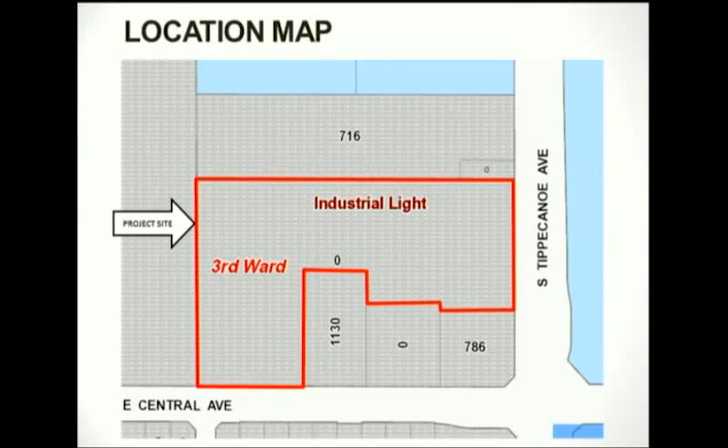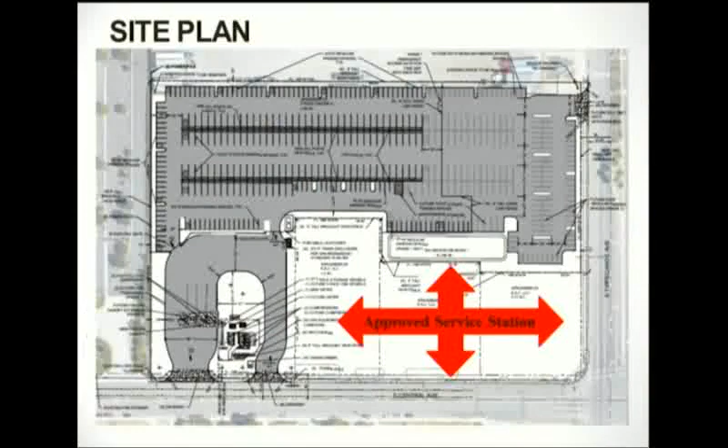Tonight our recommendation is that the Planning Commission adopt resolution number 2022-022, adopting the mitigated negative declaration and mitigation monitoring and reporting program in accordance with section 15074 of the California Environmental Quality Act, and approving Conditional Use Permit 21-16 based on the findings of fact and recommended conditions of approval. And that concludes my presentation.

Thank you. Hereby open the public hearing for item number 4. Is there anyone wishing to speak on this item? Yes. Here. Michael Lawson?

Good evening, everyone. Nice to see you again because we were there on Saturday. 1, 2, 3, 4, 5. Got a few pictures to show everyone here. Let me get going, I got 3 minutes here. Can you hand that out to him?

We were all at the site on Saturday, June 4th. Remember the noise that came up? We did a decibel reading of that yesterday. If you go to page, I think it's page 4, you'll see a decibel reading at that same site. It read in at 95. California Act, go to page 2, and you'll see that it's above the decibels.

Remember that noise that came on that ran for 12 minutes? And they stated that they're going to have 120 trucks per day, 24 hours a day, 365 days out of the year. Look at the site plan. Look at the distance between the runway and the residence. It's 900 feet. The residents are exactly 100 feet from their pumping site.

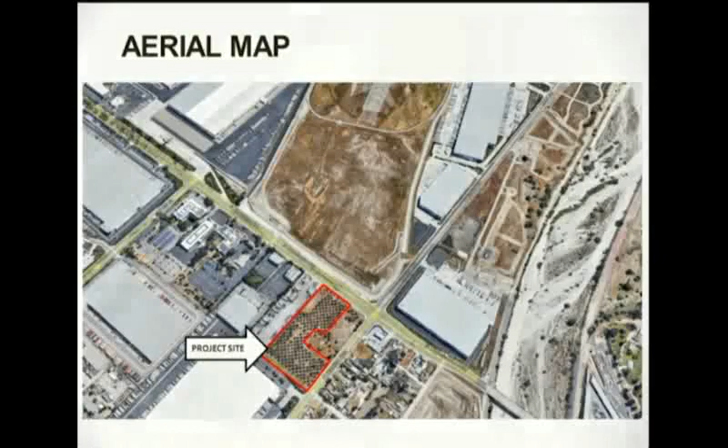Remember the noise. I'm not worried about the explosion when the jet goes down, but remember the smell that we got. They said on Saturday that one drop of that will clear a room. Well, that's one drop every time that truck fills up. And if you live within 100 feet... I also did a little canvas today between the hours of 1 and 2.

Nobody on that street on Central received this memo. Nobody. And nobody could read it because also if they got it, it was in English, and they're all Hispanic. That's low-income housing, and if you look at one of the pages there, in the black, shows how many residents live in that area.

Okay, they said there's no residents. Let's go back to what they also said, that they're on a runway, at the end of a runway, at every airport or on an airport. They have 25 airports. Not one of their sites is within 900 yards of that runway or tarmac at the end or at the beginning. They're all, either if the runway runs north and south, they're east and west. If they run east and west, they're north and south.

I also spoke to the drivers yesterday at that airport. When there's more than 4 trucks, the facility shuts down. It overheats. What happens is the trucks and buses back up. And the guy said there could be almost 100 trucks sitting there and buses and vans, and they have to wait for hours till their tech shows up out there. Remember when I talked to the driver that day? Well, there's a lot that needs to be addressed here.

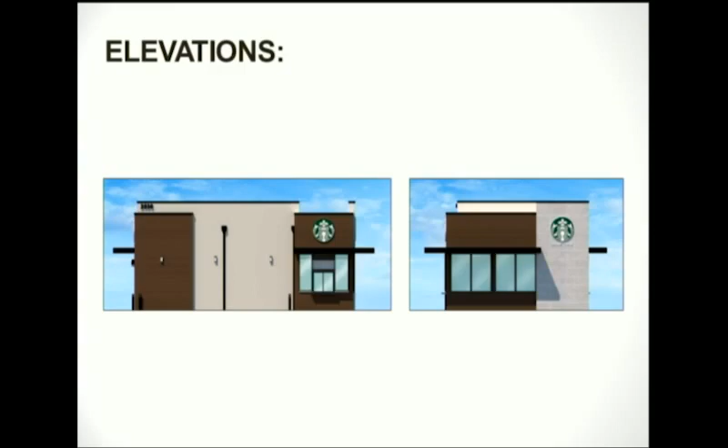The ones you're looking at specifically this evening are those fronting the street itself. The image on the left-hand side has the pickup window, fronting Highland Avenue directly, and the portion on the right-hand side is the east image, which is actually interior to the site.

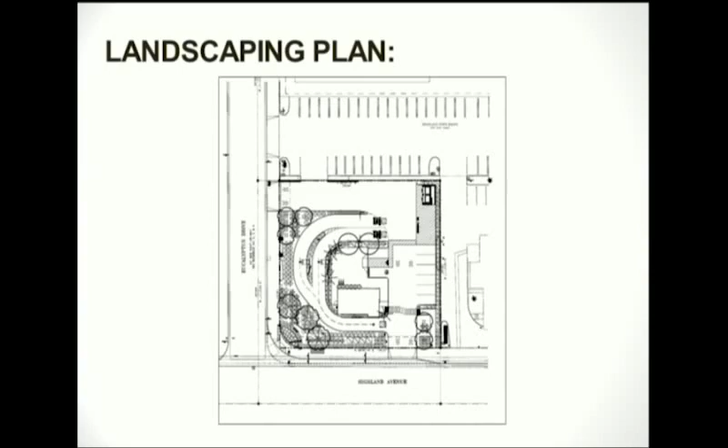The proposed landscaping plan, since it's a smaller property, is more focused along the street frontage. You can see an enhanced corner with a concave design buffering the drive-through from the street and intersection, with additional landscaping along the Eucalyptus frontage and along Highland to help screen the pickup window, and limited landscaping within the parking area to buffer spaces from the adjacent property.

With that, our recommendation this evening is to adopt Resolution 2022-030. It would find the project categorically exempt as a small structure under CEQA, and approve CUP 2203 based on the findings and subject to the recommended conditions.

One note I want to make: there's a replacement copy of the resolution provided at the beginning of the meeting. There were two omissions on my part in preparing it, both in findings 5 and 6, on pages 4 and 5 of the resolution. There was reference to a subsequent variance application, which was an error included in the reso. That is not part of the proposal in front of you. This project is fully compliant and does not require any variances.

If I may, Commissioner, it's hard to see on the projection because they're a little lighter on the image, but it's also shown on the copies included with the packet. Currently as proposed, going back all the way to the entry of the dual drive-through, there's 15 cars shown for capacity. Additionally, the way it's been designed, that other drive on Eucalyptus would allow, if it overflowed, the traffic to queue up in that area without obstructing the formal entrance to the drive-through, the exit, or the parking spaces themselves.

Okay, so that's been taken into consideration. Yes, based upon some of the issues we have in our community with the existing Starbucks. That's correct, yes. Thank you, sir. Yes, sir, thank you.

It looks like there's existing parking outside of this project area with the rest of the development. Has there been any discussion with those property owners about potential parking there, which will probably happen? There wasn't anything needed for reciprocal parking other than what is provided on the site.

On the plan, and it does get cut off here, there's an existing drive connection right along the north, just in off the driveway from Eucalyptus. That is being maintained, so it would still have connectivity with the rest of the center. But because the property is just a drive-through use only, with just that limited pickup window, it didn't need additional parking as designed, because you wouldn't have customers there waiting, going inside, or sitting like you may in more of a cafe setup.

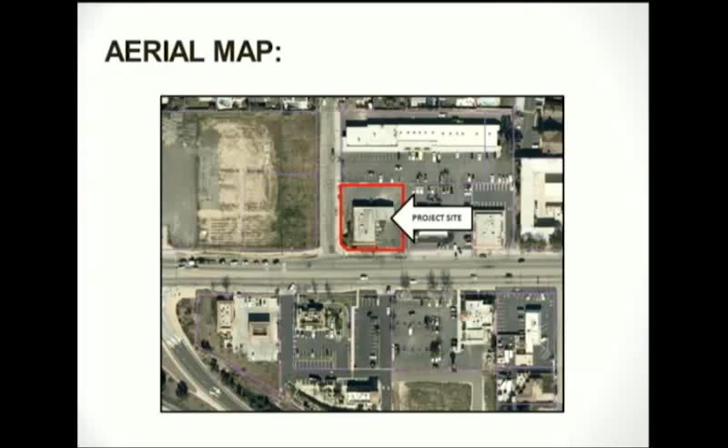Can you go back to the other drawing there? Yes, of course. So coming in off of Eucalyptus, that's a pretty sharp U-turn there to get into the lane, isn't it? It is, but the templates for that were looked at as part of their on-site circulation. For the passenger vehicles, it's a doable maneuver.

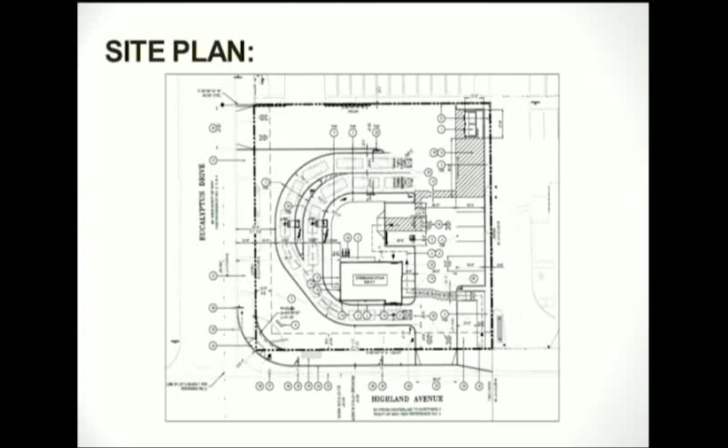And then they merge into one lane and exit out on the... Yeah, they would be able to come in here. There's 2 lanes that they would be able to queue in to order, the dual ordering boards along the western side of the property, and then after that they would merge down to the single pickup. Then exit here, and depending on the way they were trying to maneuver, they could come out to Highland. If they desired, they'd be able to go back up around, come to Eucalyptus, possibly for different movements.

And I know you've looked at traffic impacts and things - is that going to be maybe right turn only, or are we going to have cars sitting in the driveway waiting 5 minutes to turn left? There were not any restrictions for movement that were provided by Public Works as part of the review. The project didn't generate enough traffic to warrant that.

Starbucks. Okay, thank you, thank you.

Through the chair - Commissioner brings up a very good point. With the traffic there, could there be a restriction applied to that to where right-hand turns only? Are you referring to the driveway specifically exiting onto Highland Avenue?

We will look into this one, within the plan, and we will determine if that is something that is reasonable.

There's issues trying to make a left-hand turn coming out of Two Guys over there. Our traffic impact studies for this project don't show any impact, but that could be because there's a Starbucks nearby that has issues. We'll make sure the queuing on the property itself is fit for whatever the traffic is. I'd take a close look at that because I think it will work out real well. Looks like a real clean project, and I commend you for cleaning up the taco vendors.

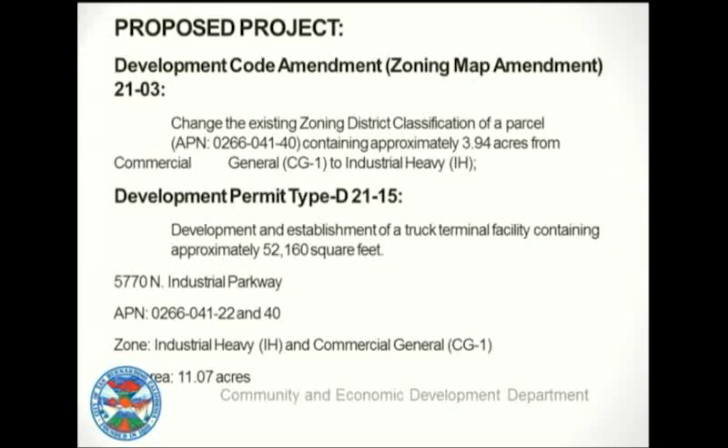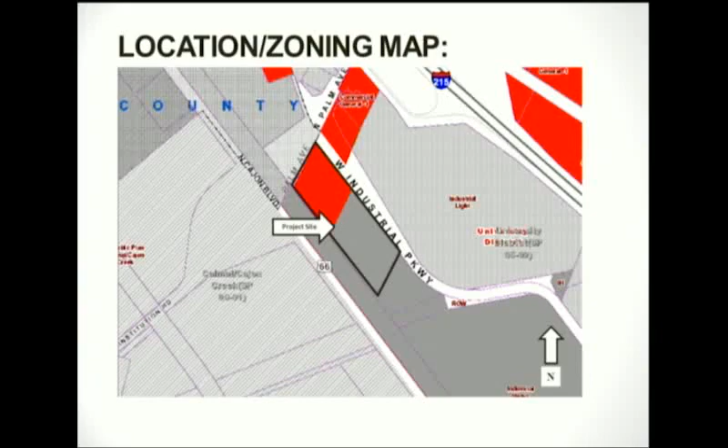As part of the analysis, this is a request for the 52,160 square foot truck terminal facility. Access to the site is being provided off of North Industrial Parkway. There are 2 driveways being proposed. One is the main driveway, on the southeasterly portion of the site, which would be the primary access to the site. That driveway would be 50 feet wide.

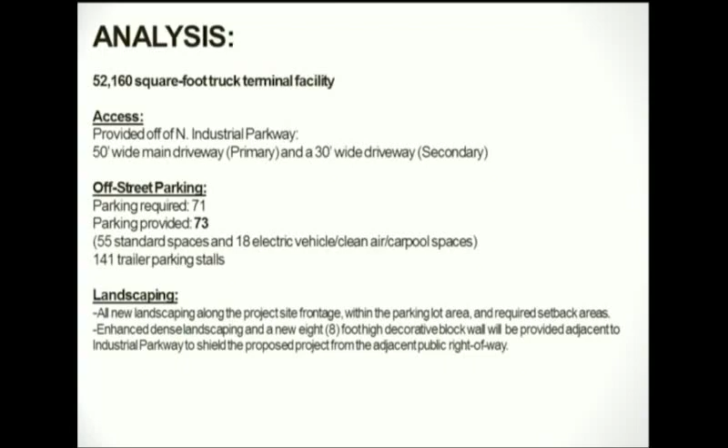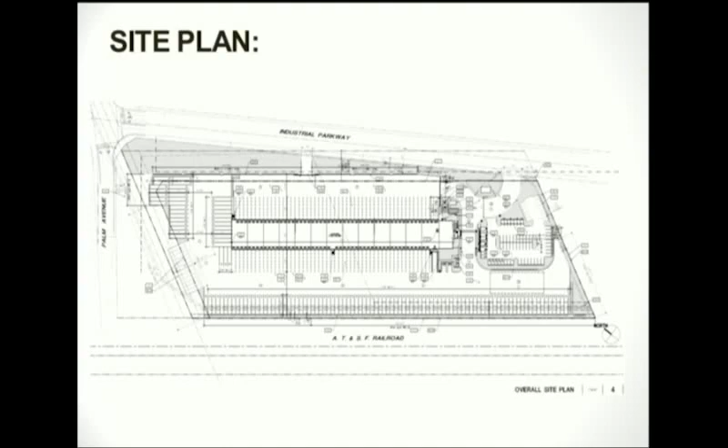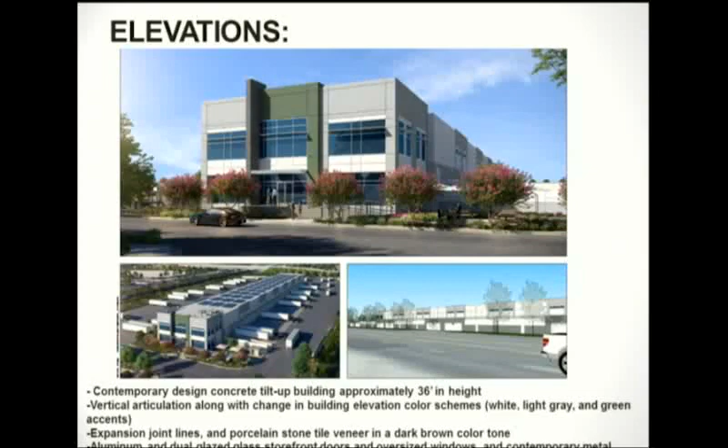With that, it is staff's recommendation that the Planning Commission adopt Resolution 2022-024, forwarding a recommendation to the Mayor and City Council for the adoption of the Mitigated Negative Declaration for Development Code Amendment Zoning Map Amendment 21-03 and Development Permit Type-D 21-15, in accordance with Section 15074 of the Public Resource Code, and direct the Planning Commission Secretary to prepare and file with the Clerk of the County of San Bernardino a notice of determination as provided under Public Resources Code Section 21152 and California Code Regulations Title 14. In addition, the recommendation is for the Planning Commission to adopt the Mitigation Monitoring and Reporting Program for the Development Code Amendment 21-03 and Development Permit Type-D 21-15, and adopt Development Code Amendment Zoning Map Amendment 21-03 and Development Permit 21-15 based on the findings of fact and subject to the recommendations of approval. That concludes my presentation.

We also have the applicant and his project team that will be presenting a small presentation on their behalf. Harold, would you kindly put the slide up for the aerial, please? Sure.

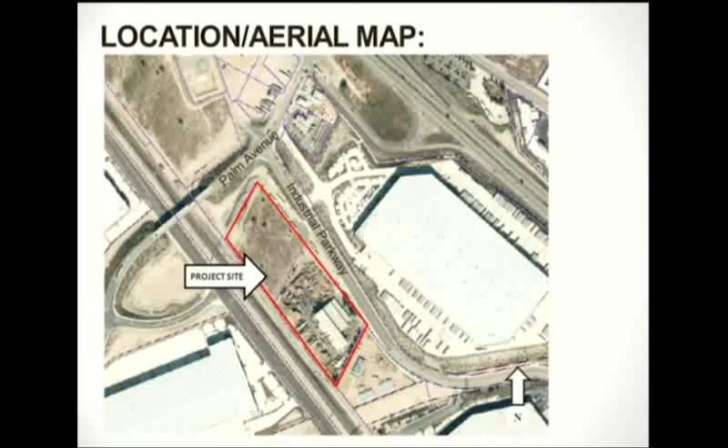Some other improvements that were part of that travel center project involve the signal up on Kendall, right in that area. There are some improvements that will be done at that intersection, and requirements to reset the computers for the signalization for light queuing, and also requirements to restripe underneath the underpass. Right now, if you're coming from the Verdemont area, there isn't a designated left turn lane to get onto the freeway, so the travel center project was conditioned to restripe so there's a turn lane directly onto the freeway and another lane or two lanes that drive straight through. This project is conditioned to contribute towards those improvements as well. I just wanted to mention those conditions that were analyzed as part of the project.

Thank you. And just to add to Oliver's comment, those conditions would be condition number 35, letters G and H, as part of your packet.

Open up the public hearing for item number 8. Anyone wishing to speak on this item?

We do have the project applicant here as well. They also would like to provide a small presentation on their behalf. If the applicant has a presentation, let's allow them to present first, and then we'll do public comment. Can we do the public comment first? Because I have to go. No, we'll do the applicant's presentation first - it'll be quicker. Thank you. Okay.

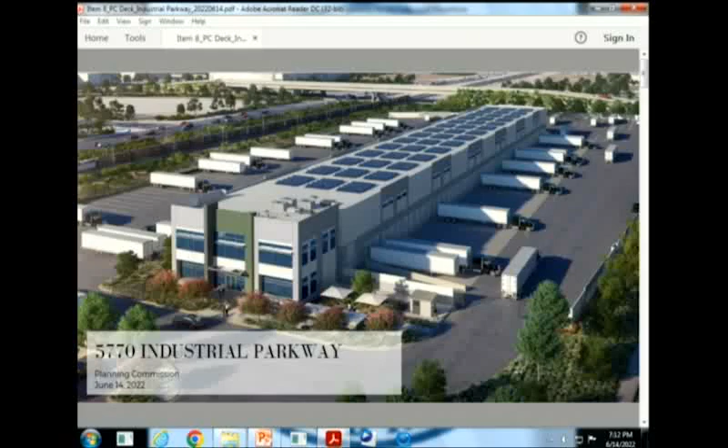Thank you, Jeremy Kraut, applicant's representative, here to do a brief presentation and answer any questions. Also have the applicant here and the CEQA preparer in the audience as well. I just want to first thank the Commission for your time and consideration of the project, and also the staff - you have a staff that has a lot of projects they're processing and a lot of work going on, and they've really been great to work with. They put a lot of time, effort, and thoughtfulness into every project. So with that, I'll go through a brief presentation. The applicant itself is Dedeaux Properties - they've been working in the related field for over 50 years.

They also have a foundation, the Rod Dedeaux Foundation, who works with community members to give back and engage the communities they work in. They participate in scholarships, giving awards to underprivileged youth to help them achieve their academic and sports-related goals and dreams. As part of that, they've identified San Bernardino as a key area they want to contribute to.

They worked with a number of organizations, including the Oak Grove Center, and provided a letter of support to thank the applicant for their effort, not just on this project but in the area over time. I'm happy to distribute these letters at some point during the presentation.

As part of the overall effort, starting over a year ago, they've been working with the community to let them know about the applicant, their intentions, and to give chances for feedback and dialogue about how they can help the community in various ways. A number of community organizations they've talked with, and events they participated in, are shown on screen. They attended these events to engage with the community and let them understand what the company is about.

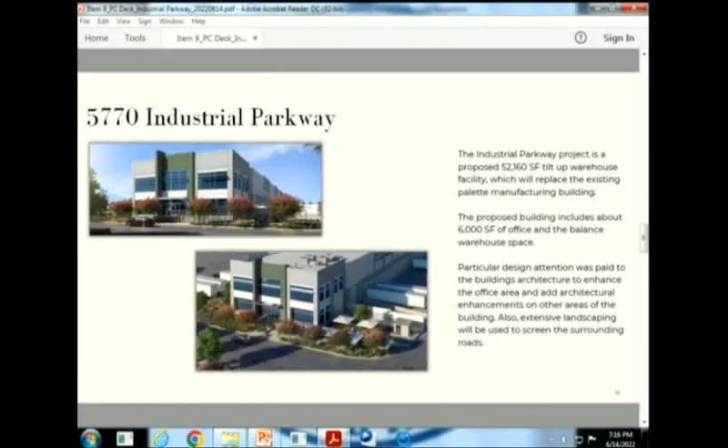We went through some of the slides about the elevations and the plans. I wanted to point out that we heard loud and clear from your staff and other city officials the importance of design. Even though the site is set back and not really visible from the area, the importance was hammered home to include quality design, and that's what we attempted to do, especially dressing up the areas visible from the roadways.

On the access point, this somewhat shows the constraints on the site. There's an existing access that provides access down to the rail line. A buffer is created along Industrial Parkway, with an emergency access off the northerly portion of the site. The primary access is further east, closest to all the other industrial uses there.

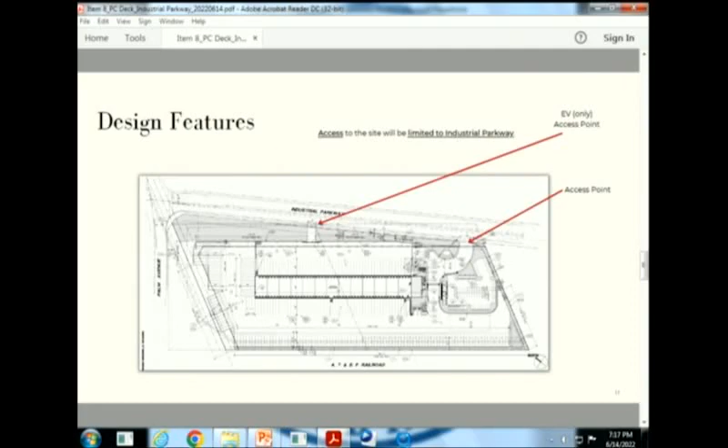As far as design features, Dedeaux is committed to sustainable features in all their projects. They go above and beyond requirements, striving for a LEED Silver equivalent design — meaning solar panels are installed, and they look for any green sustainable features they can incorporate into the building, working with the tenant to identify those up front, like EV charging stations, to make the building a low energy user. They also recognize the need for employee amenities and have that built into the design along the frontage.

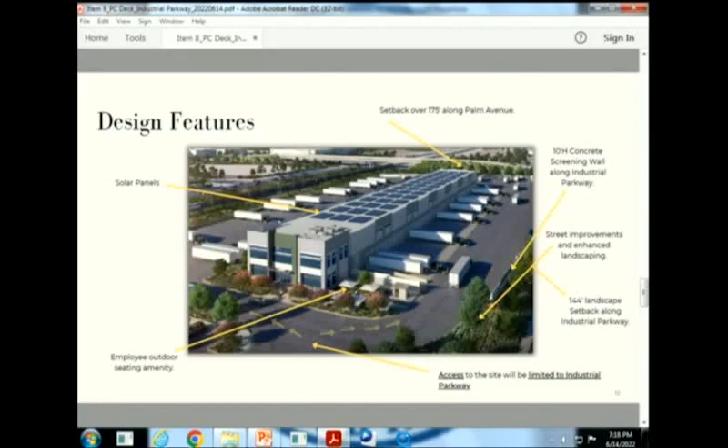I mentioned some of the other elements related to that. They do look at screening, the screen walls, the idle restrictions are mandatory, but they take that very seriously because that's a state mandate, as well as the drought-tolerant landscaping, solar panels, and EV charging, like I mentioned.

In terms of the economic benefits, the jobs-oriented area of it that they anticipate for this type of building and the tenant that would go in there, about 135 jobs permanently would be there. On the construction side, it's a fairly intensive construction effort with 127 construction jobs, and the types of jobs coming out of it that we're seeing are above $25 an hour for the type of people who would be working here.

Happy to answer any other questions, but I know you have community members who want to speak, and happy to follow that if that would be preferred.

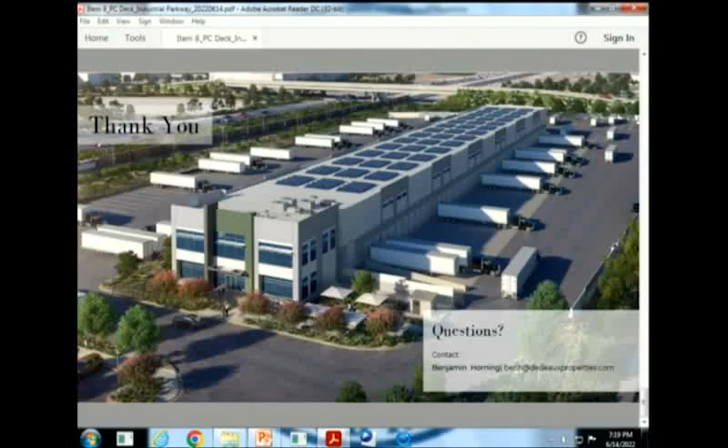Should we open up public comment? Okay, we'll go ahead and open up public comment.

My concern in hearing this presentation is that the people who live directly across the freeway are not being taken into consideration. One of the largest groups that were vocal was against the travel center already coming across the street because of the limited access. It's great to talk about freeway on-ramps and entrances and restriping, but the truth is it's the overburdening of trucks and cars.

Not to mention there are four existing earthquake fault lines right across the freeway. It's a huge fire hazard. There's only one way in and one way out. Compound that with additional hundreds and hundreds of trucks every day—there are people's lives at stake.

And I get it, across the street you don't really have to take that into consideration because it doesn't fall within the boundary lines of having to notify the public. But the truth is we just built a whole new housing development right across the freeway—96 new homes and however many people and families are coming into that.

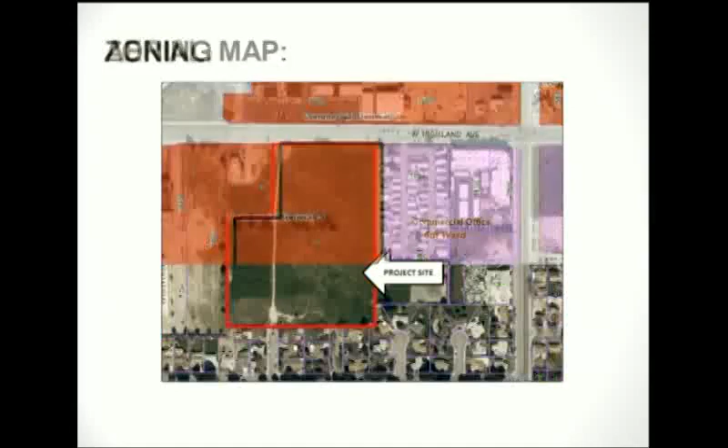This is the property as it currently sits. As I mentioned, it is one parcel, just under 10 acres in size, sitting along Highland, along the commercial corridor there, surrounded by other commercial zoning, and immediately backing up to an existing single-family neighborhood. This is an aerial of the property. As you can see, there's existing commercial across the street, a mobile home community and a senior housing complex to the east along with some commercial zoning, and then the existing single-family just south of the property.

As proposed, should the property be changed to the RM zoning district, the density would allow up to 12 units per acre, which based off the lot size would allow for a total of 118 units. The project as designed is only proposing 95, which comes out to approximately 10 units per acre, so they're just below the maximum density. There is both private and common open space designed throughout the community.

Because they are all individual lots and units, they each have their own private backyard, about 600 square feet in size on average for each lot. Then there's a common open space total of just over 23,000 square feet, in one central park we'll see in a later slide, which comes out to about 250 square feet per unit within the common space. There are also 43 guest parking spaces within the community, and as designed, there's no on-street parking.

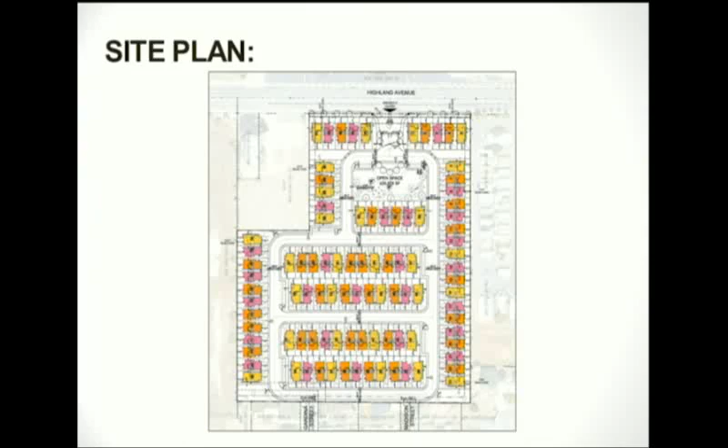Those gates are simply for emergency services, because they require secondary access to the site. The single access along Highland Avenue would not be sufficient for those purposes, but it would satisfy the access for the residents under normal circumstances.

These are the basic three different plan types we're looking at. They are all two-story units, a little bit narrower units themselves, with garages in the front, entries, and then the common living area, kitchen, dining, and so on on the first floor, with bedrooms all on the second floor.

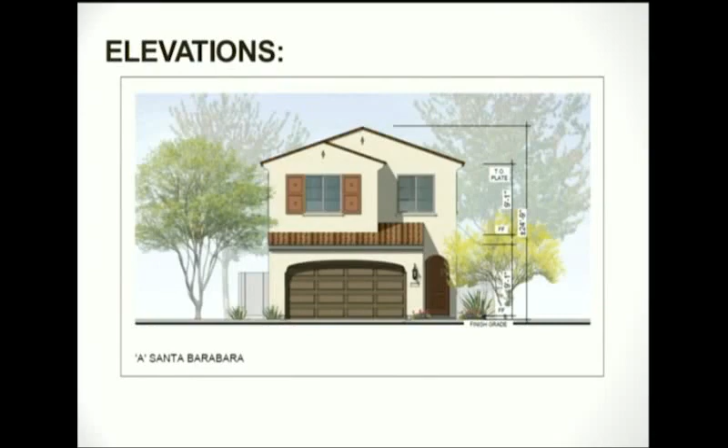The different elevations don't go for every plan type, but they're typical of the three different styles: the Santa Barbara style, the cottage style, and the Monterey style. Each of those would be replicated again through each particular layout for the homes.

As far as landscaping goes, along Highland Avenue it is a limited frontage just based off the shape of the property, but that would all be done with additional central landscaping flanking the entry, to create a prominent entry feature. Then as soon as you enter, that common park space would sit to serve the community.

There are a couple of small landscaped areas in some of the corners that are more for retention; those aren't really active spaces. That would pretty much be focused through the central park at the north end.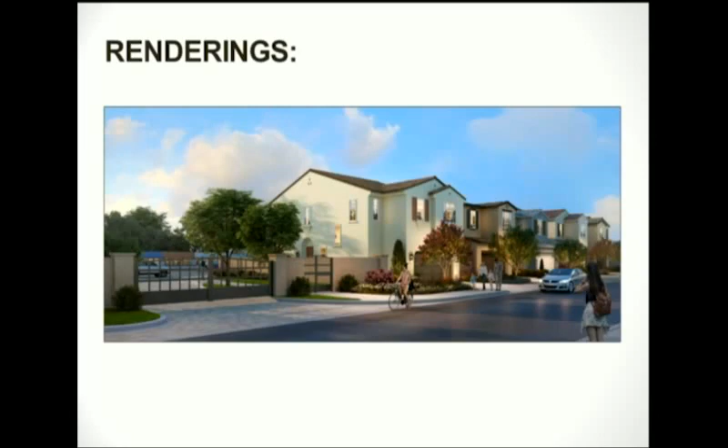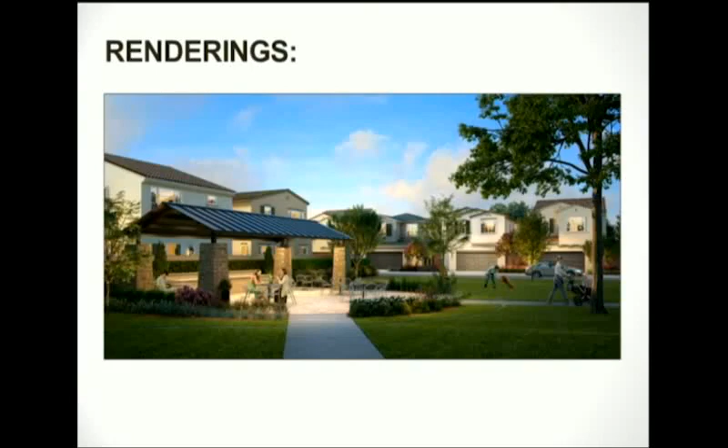From almost the same vantage point, looking further into the community, you see some of the homes starting to front the sides, and then the common park area being proposed for the community.

One note I want to make: there was just an omission on the resolution that was prepared. In the proposal, there was no mention of the MMRP, the Mitigation Monitoring and Reporting Program. That has been added in the revised copy provided for the commissioners. That specific edit does not affect the findings that have been prepared or conditions for the project.

It is limited to the title block on page 1 of the resolution, just adding detail about the recommendation for adopting the mitigated negative declaration and the MMRP, and that same language was added on page 28, I believe, under the specific action being requested - that line was added as well.

More of a procedural matter there, just for the technical record, but it does not affect the proposal or any of the comments provided on the proposal.

And with that correction, our recommendation this evening would be adopting Resolution 2022-031. That would forward a recommendation to the Mayor and City Council, adopting the mitigated negative declaration, adopting the MMRP that was also prepared, and then approving the general plan amendment, the code amendment, the subdivision, and the development permit based off the findings and conditions.

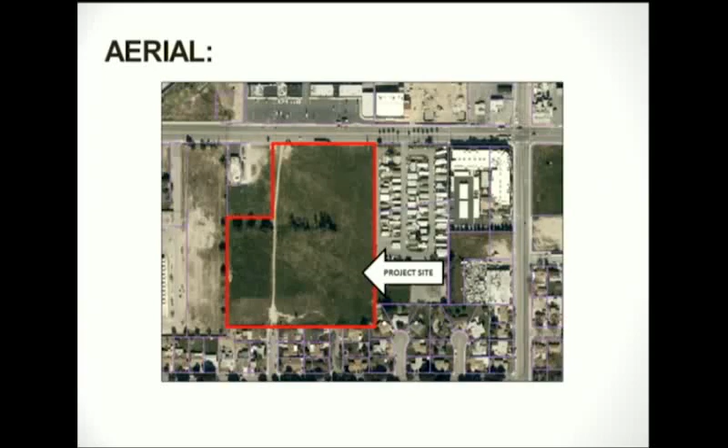My concern is because of how it's styled right now, if you look at the actual picture of the land, there is a basically worthless fence there that's been used by people trafficking through back and forth, and it's not doing anything. My question for you specifically about that gate - do you know if it's going to be a fenced gate, or is it going to be a brick and mortar gate with an entrance for those vehicles?

The reason I ask is because if it's going to be a wrought iron fence, it's going to get cut. And I know that it's going to happen - it's in the area, I've been there all my life. The next question is, I've started seeing construction trucks and things in and out there in the fields.

And as happens every year, there's always a concern - it's the wild growth there. I don't know if you've taken ownership of it now, and is there going to be something in the meantime as far as reducing the dry brush there? Because it's a concern for us that there are people lighting fireworks year-round, so it's an issue - we see one spark, it's all gone.

My next concern is, is this just a possibility, or is this a plan that starts in 6 months, a year, 2 weeks from now? Those are questions I need to know, to plan for the noise and the hours, because I work from home. Are they going to be working till 10 o'clock at night? I'm not familiar with the ordinance - if they shut down by 7 p.m., or if weekends are included, things like that. I'm just looking for basic information, because that's directly within literal feet of where you're going to be building, from my home.

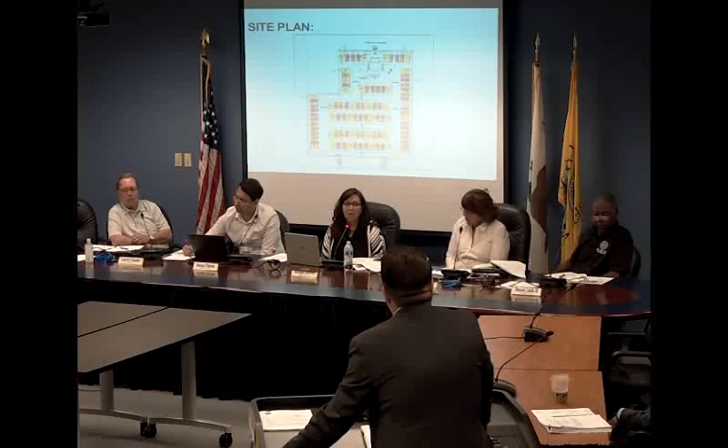It definitely does look like a very good-looking project and an asset to the area. And I do like that the size of the backyards is limited to 600 square feet, so we're not looking at any potential ADUs for that area. I do like that, so thank you.

We do have one more public comment. Really quick — Nina?

Good evening, my name is Nina John. I'm a commercial property owner in the area, and I've been looking at this vacant lot for so many years, wondering what's going to be on that lot. When I received the notice from the city that there'll be beautiful homes coming, I'm here today to just say welcome to the project.

Anyone else wishing to speak on this item? No? Commissioners? Okay, so we'll go ahead and close the public hearing and entertain a motion.

I motion to approve this project, number 8. I'll second. Call for the vote. Commissioner Quill? Commissioner Flores? Aye. Commissioner Guerrero? Commissioner Armstead? And Commissioner Lewis? Yes. All right, it's approved.

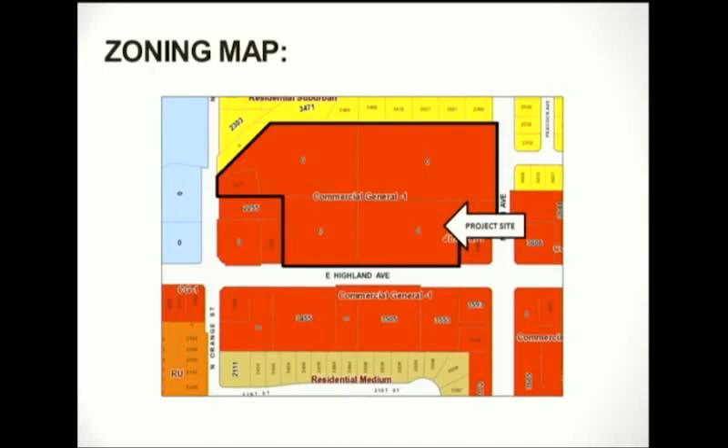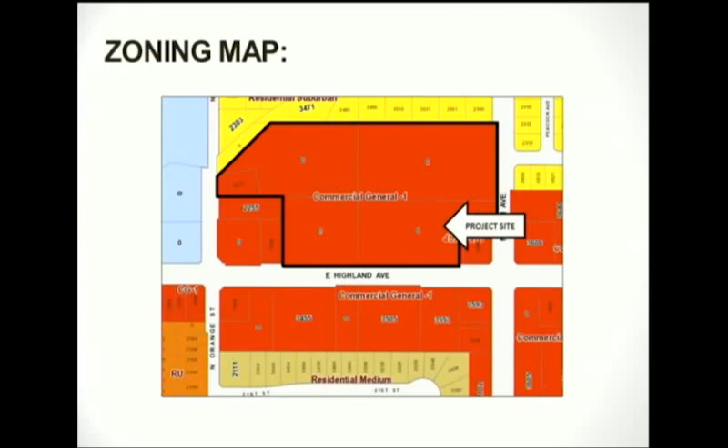This is the property as it is currently. As I mentioned, it does have frontage on all 3 streets, although access would not be taken off of Highland, as you'll see in a later slide. Primary access would be off of Palm, with a secondary emergency access off of Orange. It's surrounded by other commercial development at the 2 corners of the intersections and across the street, and an existing single-family neighborhood to the north.

This is an aerial of the property, primarily a vacant lot. This one does have a slight slope to it, so it's not as flat as the other one. There are limited structures on the far west end fronting Orange that would be removed as part of the proposed development, but otherwise it's undeveloped. You also have the existing commercial, as I mentioned, that cuts into the 2 corners of the property.

Along with the other improvements along Highland Avenue, this proposal, being a little bit larger, has split the types of units proposed as part of the development. Approximately half would be clustered or conventional units similar to the previous individual lots with their own private backyards, more typical detached style. That includes 3 different plan types, plus 3 additional plan types that are part of the clustered units sharing a common drive off the main road, each with their own driveway fronting it. Those are a little bit smaller units, don't have as much private space, just to give some variation in what people might be interested in.

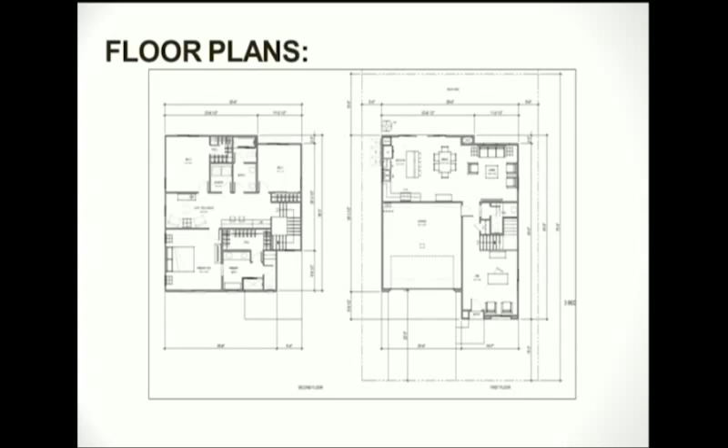Just working through our 3 different floor plans for those conventional lots. It's typical to have 1 bedroom on the ground floor because these are slightly larger units, with common living area, kitchen, dining, and garage, and the remaining bedrooms upstairs. As you get into some of the larger units, you also have loft spaces with options to be converted to additional bedrooms, so some units can provide up to 5 bedrooms.

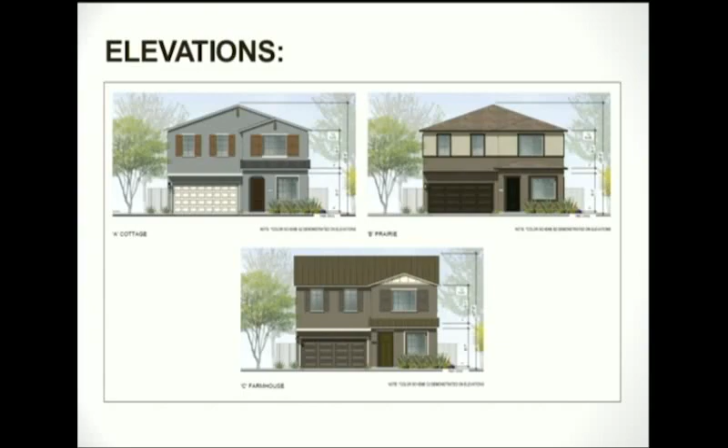The final floor plan is again fairly typical of the other 2. The elevations here, as I mentioned, are the cottage, the prairie, and the farmhouse. This is typical of just one of the floor plans, but it gives you the same kind of style that would be proposed for all of them, compatible with each other but providing enough distinction to give a little variation throughout the community.

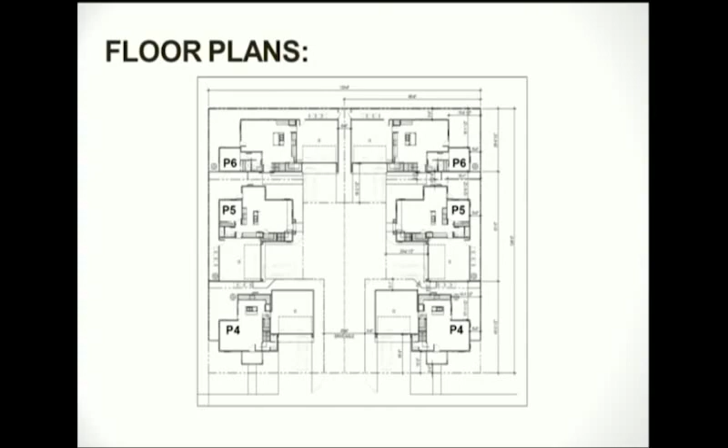The clustered units, as I mentioned, the way they would work - I don't believe we have a lot of projects like this in the city, but this is a lot of what you do see being built now. You have a common drive that comes in off the main road; the front 2 units have their driveways off the main road, and the other 4 come in on a common drive, with everybody having their own private drive area in front of their garage where they could also park, plus a small outdoor area around the rear units.

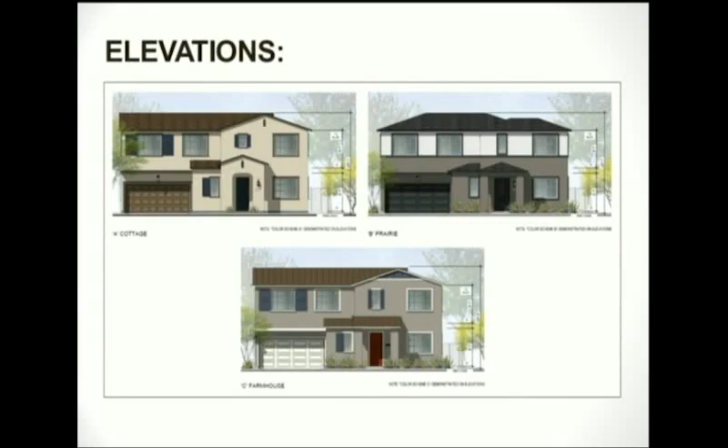And again, using the same design styles for the elevations: the cottage, prairie, and farmhouse. The landscaping on this one - apologies, we did have to break this up onto 2 slides.

You can see you have that entry. It's a little bit more of a linear entry on this project, so you have more tree line on either side, and a bigger median here to enhance that a little more. And then the main park space right as you enter the community, just as with the other, and you see some of the guest parking along the sides of that.

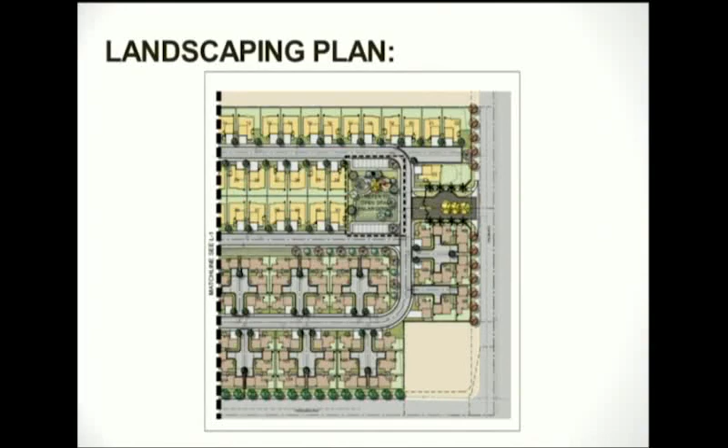We have a much larger frontage along Highland Avenue and Palm Avenue compared to the previous projects, so we have tree lines running along all those streets that would enhance the pedestrian feel around the edge of the community.

The other half of the site is the western end where you do exit to Orange. Again, this would just be an emergency exit - it would not be one of the main avenues accessible for residents. And then you have some smaller linear park spaces that are built in around some of the remaining areas there.

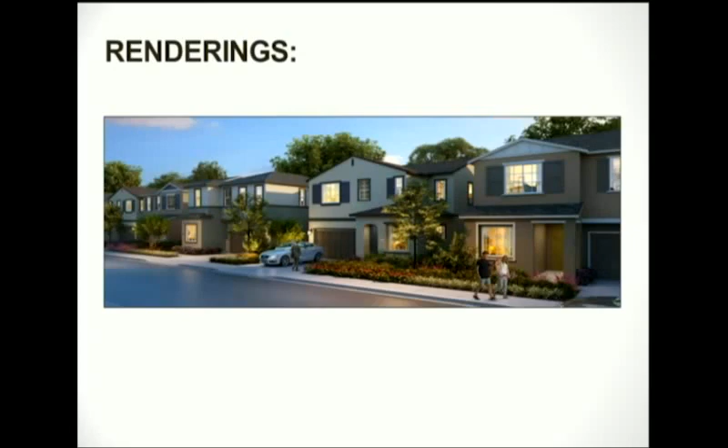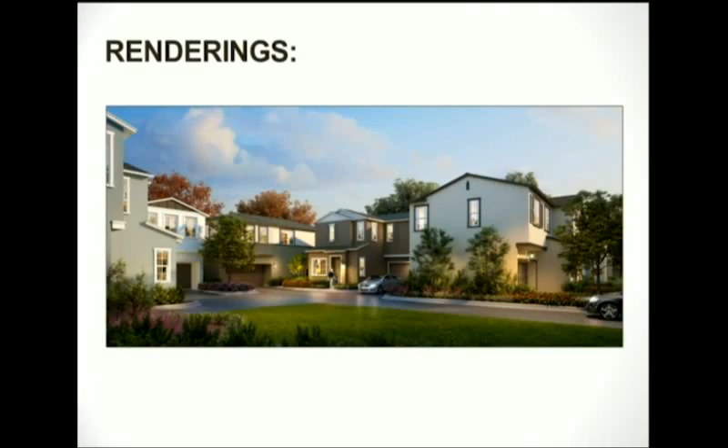And then a few examples of what we would be looking at for this project. These would be the conventional lots, so more of your typical inline detached single family, all fronting that main road that runs throughout the community. These are your clustered lots, which gives you an idea where you come in and everybody branches off of that main drive into their own private driveway, with park space throughout the front of the community - this is what you would see if you came in that main entrance.

Same note as with the previous item, there was that minor correction to the resolution about adding detail for the mitigation program, simply affecting the first page and the action page at the end of the resolution, in no way affecting any of the proposal or the conditions.

With that amendment to the resolution, adding that line, our recommendation this evening is adopting Resolution 2022-032. This would also forward the recommendation to the Mayor and City Council to adopt the mitigated negative declaration, the mitigation program, and approve the general plan amendment, the code amendment, the subdivision, and the development permit. With that, I will open it up to any questions. Thank you.

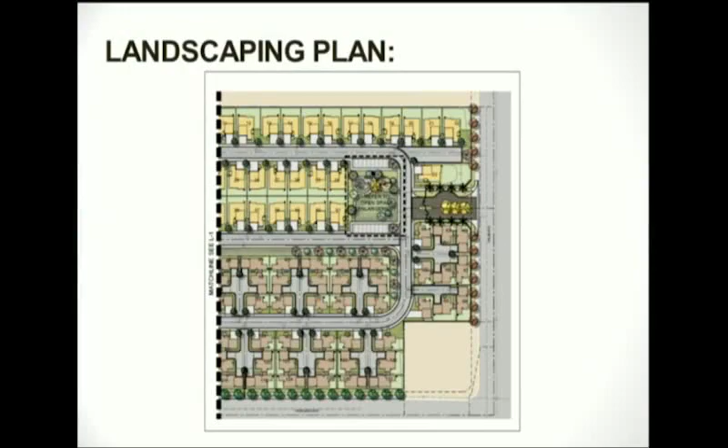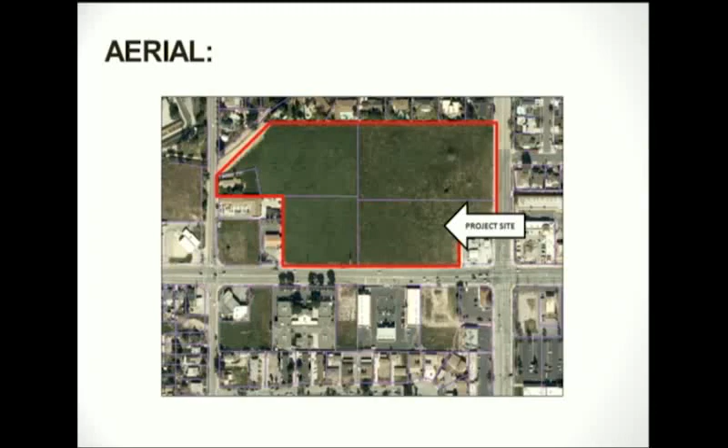Okay, well that's a little better. Okay, and the entrance that's on Palm, is that gated? Yes, same thing as what we did on Madison and Gardena on the other property, where it's emergency vehicle access only.

So you won't have residents of our neighborhood or any other neighborhood going in and out of that. It was only in case of emergency - a fire truck, police officer, or ambulance could exit that way. The one on Palm is your main entry, the one that's recessed with a queuing space. There is a secondary gate along the west end on Orange, but that's simply for secondary access - one of the standard requirements for emergency services.

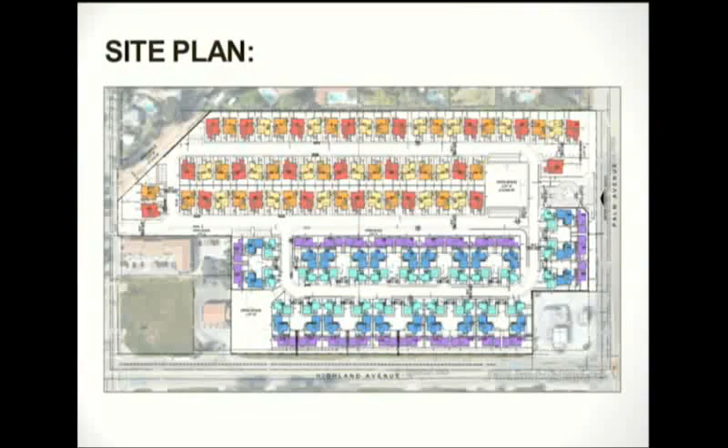The average - well, you did go over some of the square footage. The front yards, is this one of those deals where the builder is going to be landscaping the front yards and the backyard is just dirt? Yes, that's typically how it works in this type of setup.

And they are block walls between each unit? Correct. Wow, you've really done your homework. Okay, we've done a couple - what about...

The common - not the common area - the open space there, is any of that going to be artificial turf, or did you make plans for any of that? I don't think there's any artificial turf there - it's all going to be natural. There's going to be some turf areas for kids to play on, but a lot of it will be drought tolerant landscaping or native plantings.

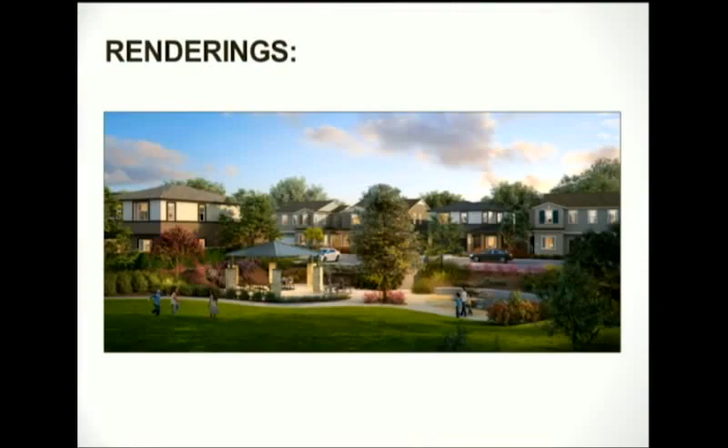That's what you're looking at right there is the park area - a lot of it's grass. Pretty much the way most are doing it now is all of the drought tolerant shrubbery, but you still provide limited natural grass areas just for kids to play in and other people to enjoy.

Okay, all right, that's all. Let me see, is that it? Yeah. Oh, there's one other little thing.

So 41 guest parking spaces for a unit that - well, you got 40, you got 100 and what is it, 133? Correct - remember, 2-car garage, 2-car driveway. So 41, each guest unit parking would still have the capacity for 4 parking spaces with their garage and driveway? Yes, both the conventional and the clustered units. And then there would be 41 on top of that? Yes.

Okay, I'm gonna let you go with that, because it's just that you got a bigger complex. I'm not making any comparisons, but it's bigger than something else I heard that has 43. That's correct. What was the determining factor that got you to 41?